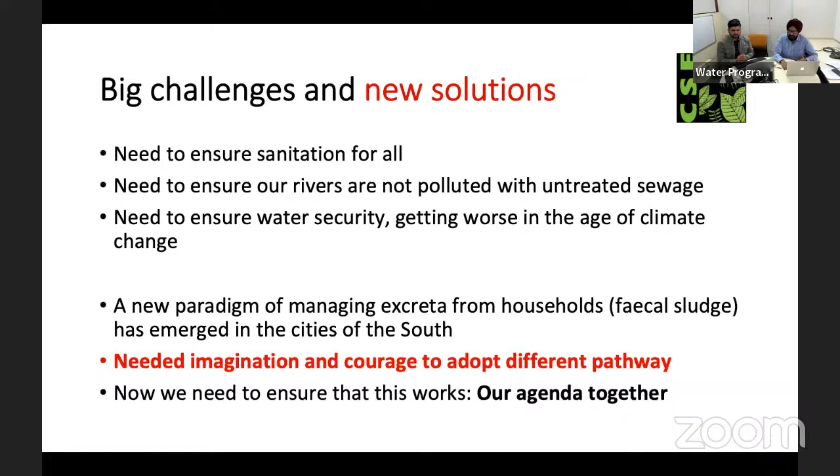A new paradigm for managing excreta from households emerged in the cities of the Global South, the FSM intervention, and we need to look at it as a nascent, growing initiative which may need several corrections, mistakes may have been committed. But what is most important is that FSM provided a much needed imagination and courage to adopt a different pathway, which was not done so far. And now we need to ensure that what we started works, and our agenda together is to make it work. These are just a few slides on one state, because Mr...

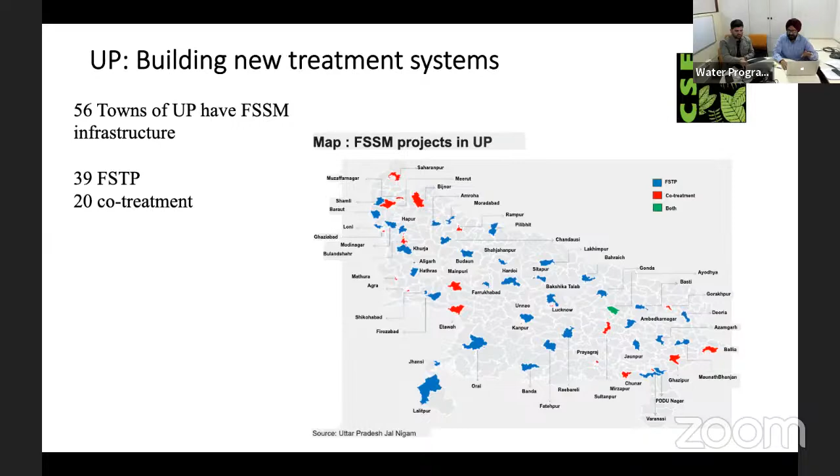I am only sharing the kind of scale where CSE is working in one state. In a province like UP itself, we have 59 treatment systems which were implemented. We had different technology systems, and this is also a contribution of Dhaval when we tried to map out the kind of treatment systems we have in India. We realized that it is nature-based systems and hybrid systems predominantly—I'm not saying this is the case everywhere, but this is how we look at the technology systems emerging on the ground.

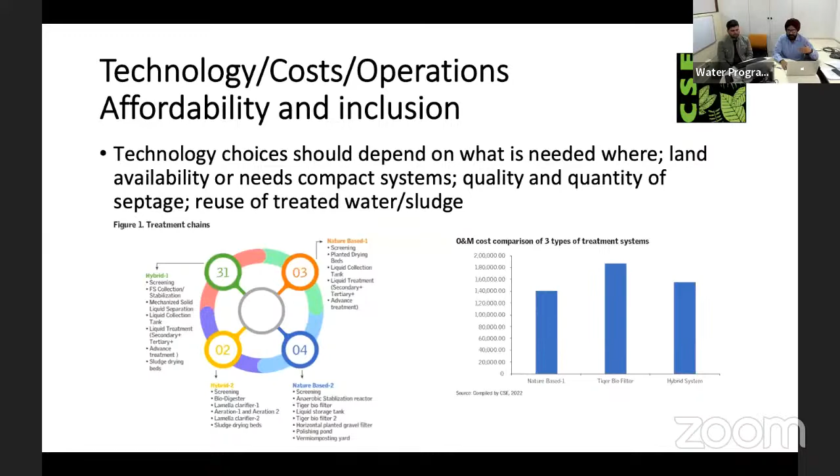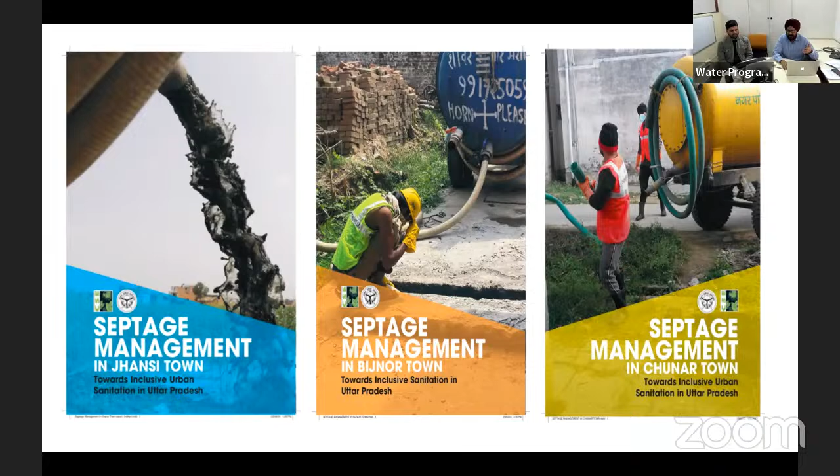We try to do an analysis of what is there. In CSE, we looked at the experience in different towns, documented it, and tried to address the gaps emerging from there. This is what we feel represents a challenge for an agenda for a new generation reform, which CSE is pursuing in our work. And with Mr. Mahapatra in Odisha and several other states, we are also partnering.

So FS treatment systems are there, but the hard work begins in ensuring the plants work at capacity. We need to ensure that the technology in FSM is robust in terms of standardization and provides guidance. We need to focus on the reuse aspects of both water and sludge, and we need methodologies to track the outcomes for both.

We see there is a little fatigue in India and elsewhere. When we talk of FSM, everybody wants to jump towards citywide inclusive sanitation. We are not saying we don't want to, but we need to ensure that what has happened is robust and sustainable. Then we hope we'll be able to make a better jump towards CWIS.

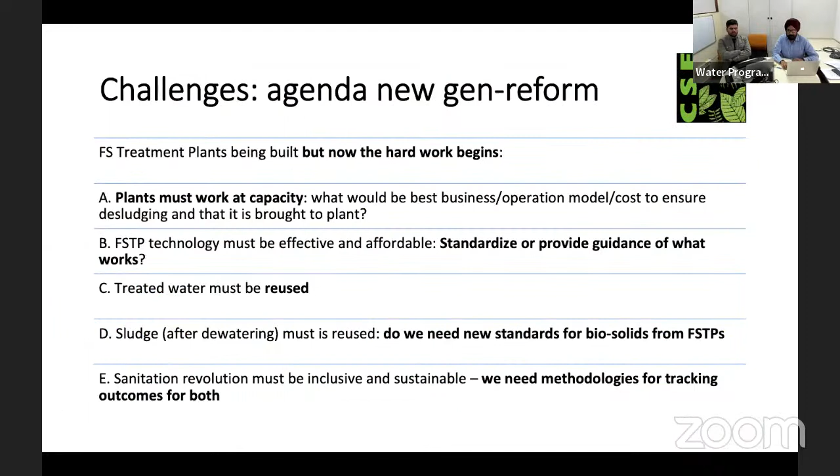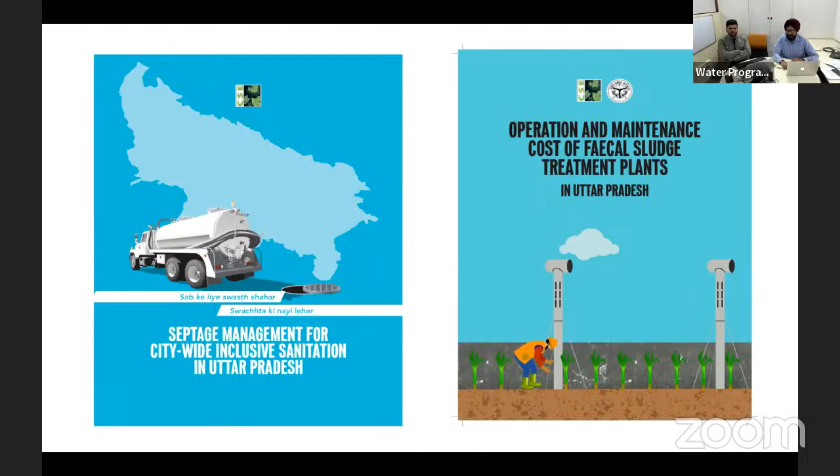So this is what CSE has been doing. We have looked at all the works done in our state—what is the status of septage management, say in UP, and what are the operations and maintenance aspects. We have tried to document and analyze that.

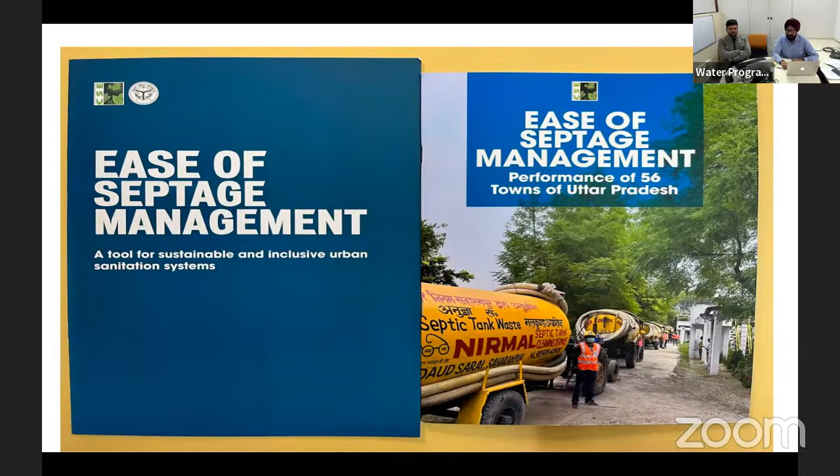We have also assessed the performance after a year, through a tool which looked at a 3-star rating of towns at different levels of septage management performance. We worked on operations and maintenance, state model bylaws—these are all enabling guidelines to ensure the work is sustained. We don't just give up once the construction has happened; we ensure the plants become operational.

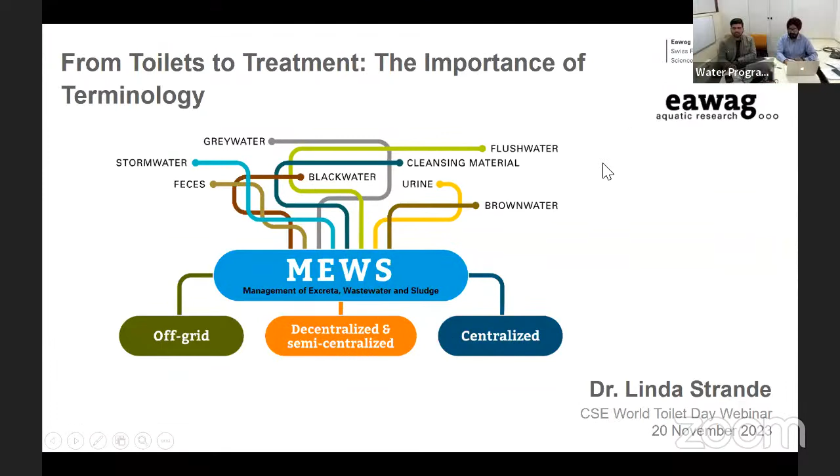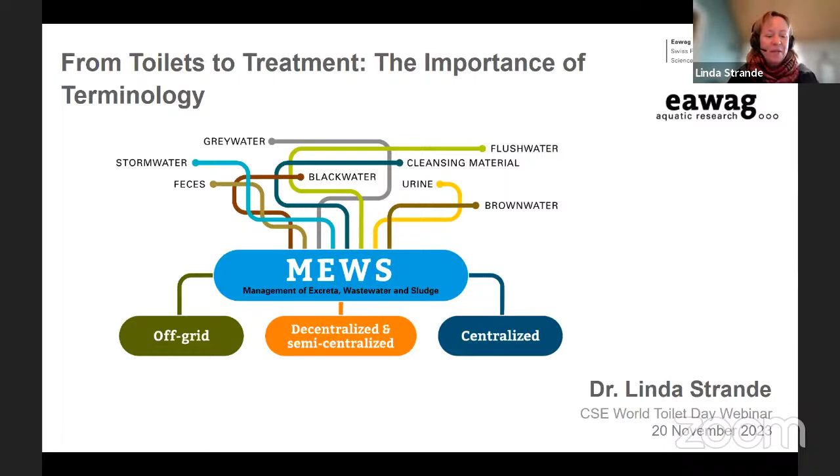As you said in the introduction, I lead a research group called MEWS, which stands for Management of Excreta, Wastewater, and Sludge. Today I'd like to talk specifically about terminology, starting with three examples of where terminology has brought us. The first is sanitation: it was only in 2002 that sanitation was incorporated into the Millennium Development Goals, which had a huge impact because prior to this time, development projects were mainly focused on drinking water provision.

The second is sustainable. In 2003, the United States EPA, Environmental Protection Agency, officially put in their guidelines that non-sewerage sanitation could provide sustainable long-term solutions, which also brought a lot of credibility to our work. And the third is treatment.

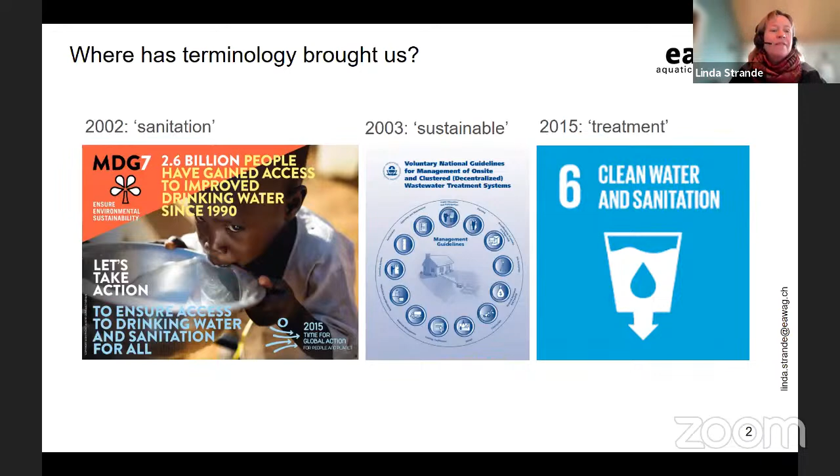In 2015, this was incorporated into the Sustainable Development Goals, and it's really helped us increase awareness of the importance of transport of wastewater to treatment, be it via roads or pipes. This has brought us a long way, and this recognition has helped us galvanize our field. We have increased public awareness, which can lead to change through political pressure, increased commitment, uptake, and incorporation in national regulations and implementations.

We're looking at citywide scales and employing a service delivery approach instead of just infrastructure provision. There's an increase in evidence-based research, and knowledge sharing, education, and mentoring has helped build a critical mass of engineers, practitioners, and scientists working on sanitation. But we know we still have a long way to go.

This figure is from a recent publication I co-authored together with authors from the UK, Brazil, Uganda, Vietnam, and Japan. What you see here are the three basic existing modes of sanitation service provision. On the left, we have sewer to treatment. This was originally planned for urban areas where there's a high enough population density to support it. It relies on a flush toilet where water then conveys waste to treatment, so it has fairly liquid wastewater, and the level of technical development is established.

On the right, we have at-source land-based treatment. This was originally planned for rural areas up to the urban periphery where there is enough land available for adequate treatment. This can be dry toilets or flush toilets, so the wastewater generated is liquid to semi-solid, and the level of technical development is also established. What we have in the middle is transport to treatment, and this relies on at-source containment and storage.

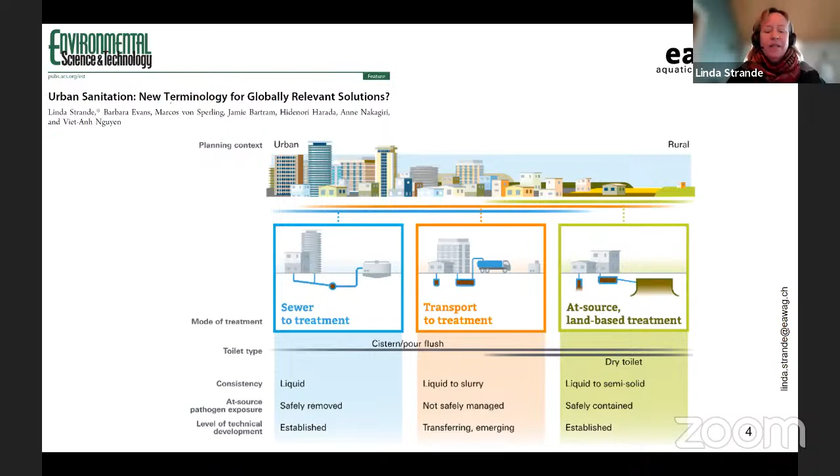We don't talk about fecal sludge in Europe. Another misconception is that it provides equivalent levels of treatment to those associated with land-based treatment in rural areas, which is often not the case based on incomplete containment and service chains. So we know that in reality the management is much more complex and often does not result in the delivery of safely managed sanitation.

So again, why does terminology matter? I think we all agree that in urban areas, excreta must be transported away from the point of production for treatment, or safely managed and recycled at the point of production. The misuse of fecal sludge and on-site sanitation have been confusing or ambiguous, which hampers planning of improvements. So some people now have switched to using non-sewered sanitation instead of fecal sludge management, but that's also ambiguous. What you see here are the good friends Pee and Poo having a moment of existential angst, where Pooh says, 'What does it mean that we're non-sewered?' And P replies, 'Yeah, what we are not says nothing about the complexity of how or if we are even safely transported to our final fate.'

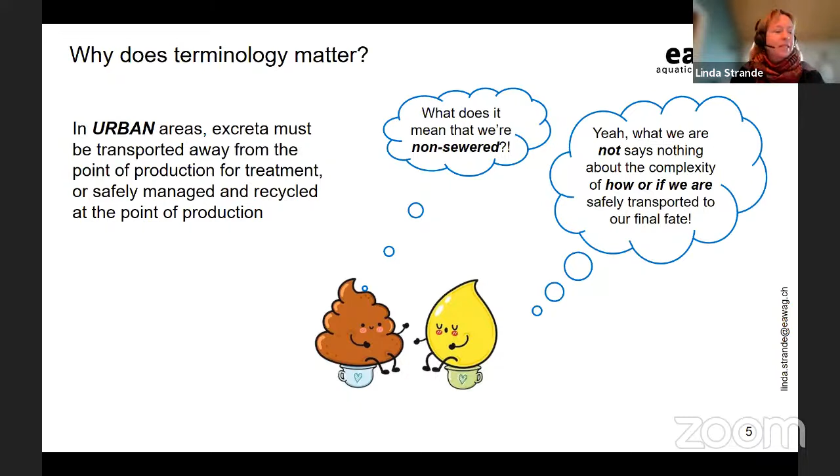To illustrate, I'll provide some more examples of how our increase in scientific knowledge is chipping away at these misconceptions. The first is that 'fecal sludge' is not a useful descriptor. Fecal sludge conjures up images of dry, thick, sludge-like feces, when in reality, what is referred to as fecal sludge is typically less than 5% total solids. It includes water from pour or cistern flush toilets, cleansing, bathing, and cooking.

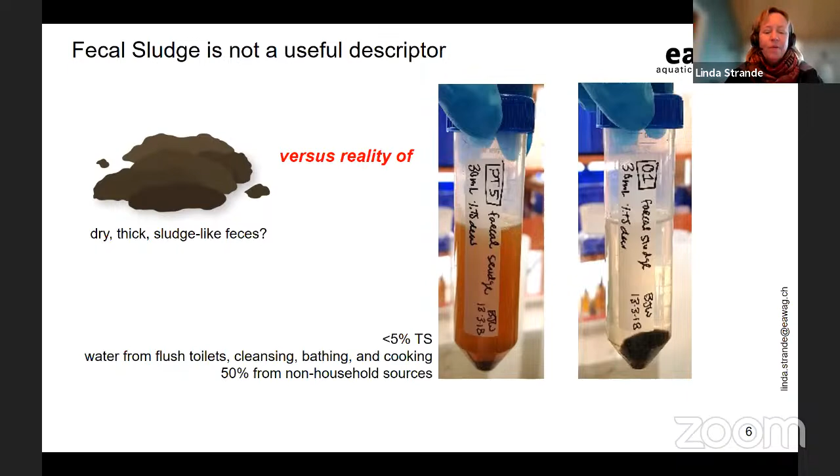Although global statistics on sanitation coverage are limited to household care facilities, the majority of people spend most of their waking time outside the household where they sleep at night, and non-household sources could be 50% of total wastewater production. It's coming from offices, restaurants, markets, malls, small-scale manufacturing, hotels. And when planning for fecal sludge management, these streams are rarely accounted for, resulting in inadequate management capacity.

The next point is that septic tanks and pit latrines in urban areas are in fact not septic tanks and pit latrines, which also calls into question what is sometimes meant by septage. The reality is often a chaotic mixture of inappropriately constructed solutions that attempt to contain and store wastewater on site. As we saw in the last slide, huge volumes of liquids are flowing into containments, which can be as high as total water consumption also from industry.

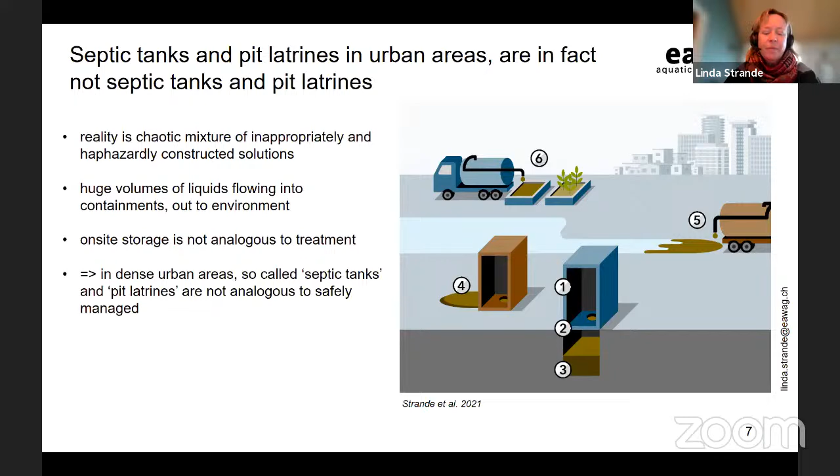I just want to emphasize that on-site storage is not analogous to some form of treatment, and simple leach pits do not replace the pathogen removal that occurs in engineered drain fields in land-based systems. The liquid coming out of these so-called septic tanks is not safe for transport in open drains or sewers. So in dense urban areas, so-called septic tanks and pit latrines are not analogous to safely managed systems.

The next point is that wastewater streams from human feces are not all the same, and this has significant impacts on treatment. If we think about sewer-based wastewater, wastewater is only referred to as sludge after it's undergone some type of treatment process. It can consist of settled solids from primary treatment, microorganisms or biomass from biological treatment, and digested biomass. Fecal sludge, on the other hand, is stored at the source from zero to many, many years prior to batch-wise collection for delivery to treatment.

Importantly, at-source storage is not analogous to the anaerobic digestion that's highly process controlled at treatment facilities, and storage is not treatment. This has led to the misconception that time since last emptied predicts stabilization, which is not correct and does not hold up to scientific investigation, and also leads to misconceptions about appropriate co-treatment.

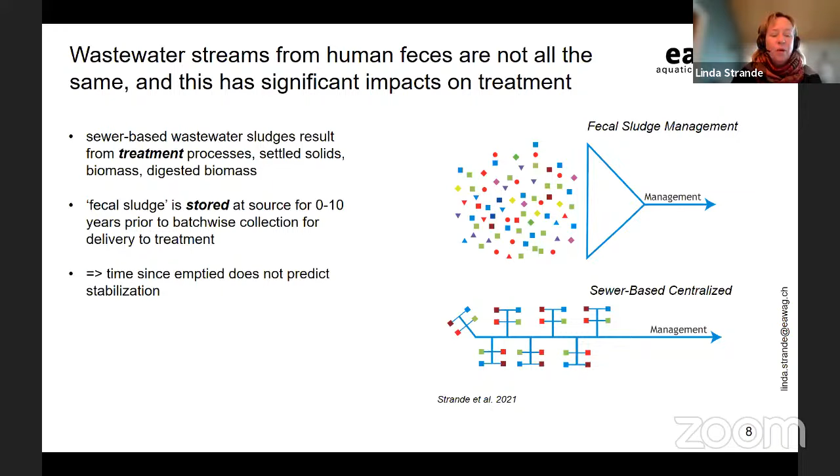I submit that the use of accurate and technically robust terminology will improve management decisions and the design of appropriate treatment facilities for the actual flows they are receiving, and increase opportunities for resource recovery.

As is the name of this webinar, in our paper we propose a new vocabulary for how wastewater is transported to treatment. This is important because otherwise, as we know, wastewater or fecal sludge often does not make it to treatment. What you see in the bottom left-hand corner, category 1, is fully road transported. This is what we would call fecal sludge management, and in this case tanks should be fully sealed to prevent leaching into the environment.

In the paper, we give cases and examples from around the world. In this case, we give the example of Egypt and Dubai. The next one, category 2, is separate collection of gray water. Gray water could be piped away to treatment or safely managed and recycled at the point of production. Here I would just like to refer to the case of Odisha, which is being presented in this webinar by my colleague, the engineer-in-chief.

The next one is category 3, mixed transport. This could be settled sewerage, where we have interceptor tanks that collect some settled solids with the liquid being piped to treatment, or also the example of Johkasou treatment in Japan, in Tokyo and Osaka. Category 4 is fully pipe transported, which may be conventional or simplified sewerage.

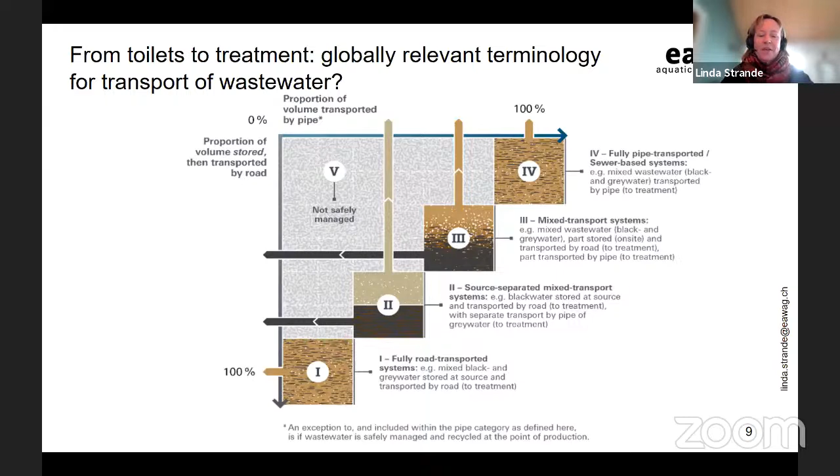So again, I just want to emphasize, I feel we need improved communication and understanding to inform design, decision-making, planning, monitoring, policy, and science, and that we need a globally relevant vocabulary. I'd like to leave you with that brief introduction as food for thought, and I'm looking forward to hearing your opinions on the topic. Thank you.

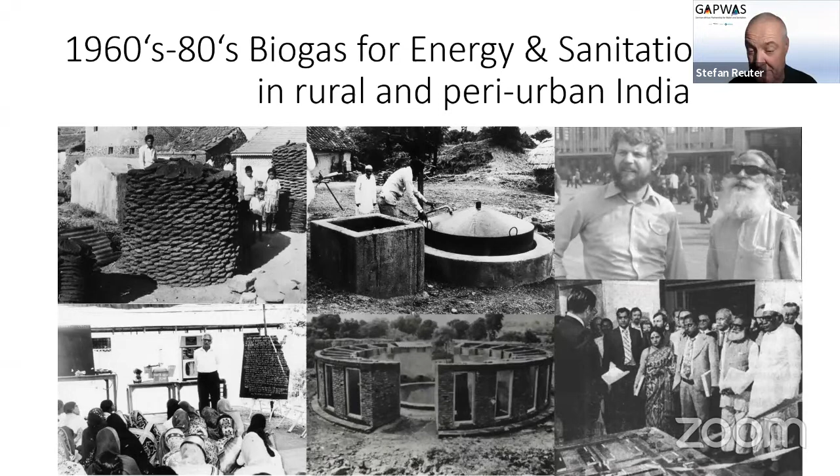Jashbhai Patel and his Gobar gas plants were in ignition there, and that was boosted after the oil crisis in the 70s. What you can see down in the middle is a community toilet connected to a biogas plant, a fixed dome biogas plant. So I think the journey of using anaerobic technology, taking out the energy for also treating wastewater from toilets has started quite early on.

In the 90s, despite all the nice biogas technology, people continued moving in big numbers into cities and ended up in deep shit. That's why a number of people, the German NGO BORDA, French, GERES, 2 Chinese and 3 Indian NGOs between 94 and 96, were putting their heads together and saying, okay, how can we expand and build on what we have been developing in order to do some kind of wastewater treatment, because something is better than nothing. So 100 plants with 30% efficiency are more effective than 10 plants with 90% efficiency.

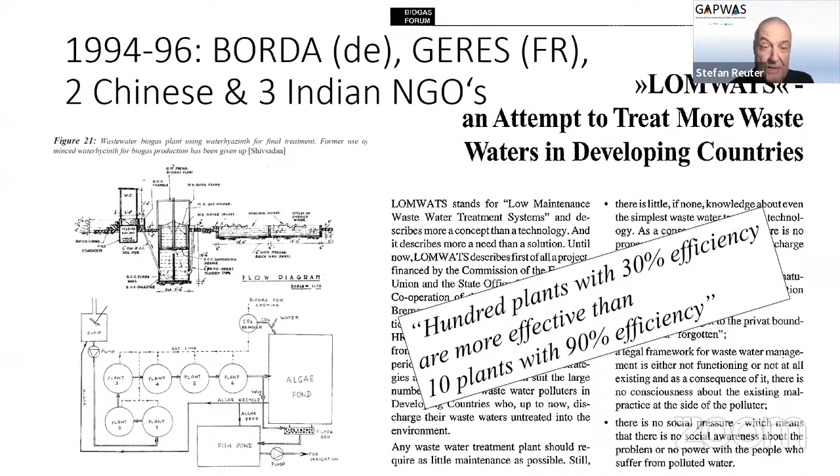And this is not only an issue for the South, but also in Europe. When new member states of the European Union joined, we traditionally in Europe have been going for the highest treatment efficiency, but meanwhile a number of wastewater treatment discharges, also agricultural discharge, is going into the Baltic Sea, and we have a lot of anoxic zones there.

But the output of that joint effort between China, India, France and Germany was to come up with a handbook with Excel spreadsheets. Actually, the initial title of 'low maintenance wastewater treatment system' was then changed into 'decentralized wastewater treatment systems,' because LOMWATS carries unjustly an image of low standards, and nobody wants that.

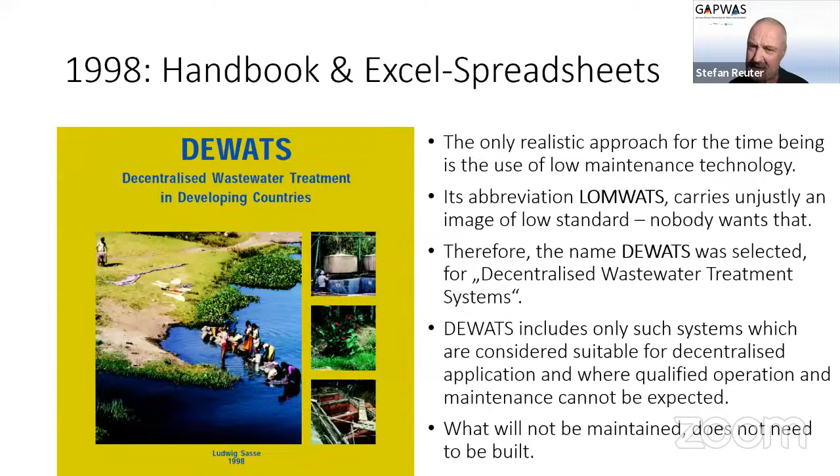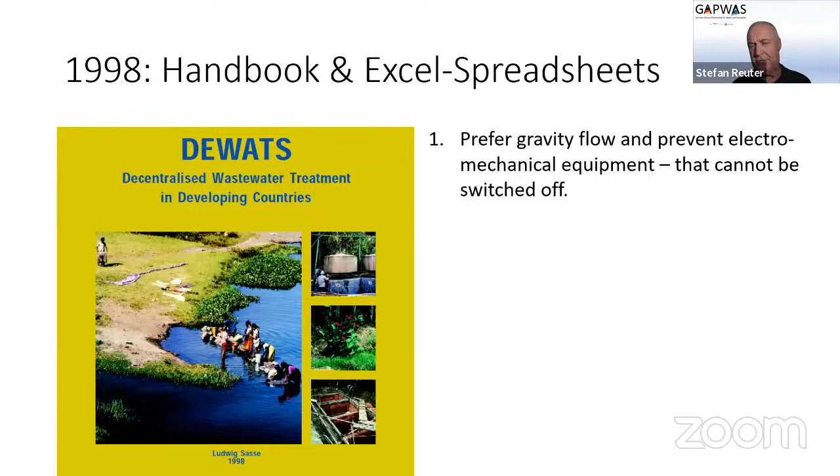But what was it about? It was actually just 5 points. Prefer gravity flow and prevent electromechanical equipment so that nothing can be switched off, even in power shedding and other difficulties. Go for anaerobic digestion under tropical conditions. Up to 90% of the organic load can be removed.

Underground tanks of that anaerobic treatment allow for dual use. You can put them into public roads or into parking lots for cars, so you don't need that much space. Add nature-based systems for further polishing, like planted gravel filters, polishing ponds where appropriate, and also maybe at a distance where you pool a number of pre-treated wastewater from anaerobic treatment. Reuse water, energy, and nutrients wherever you can, and select and combine treatment modules according to that end use. Think at the end from the beginning.

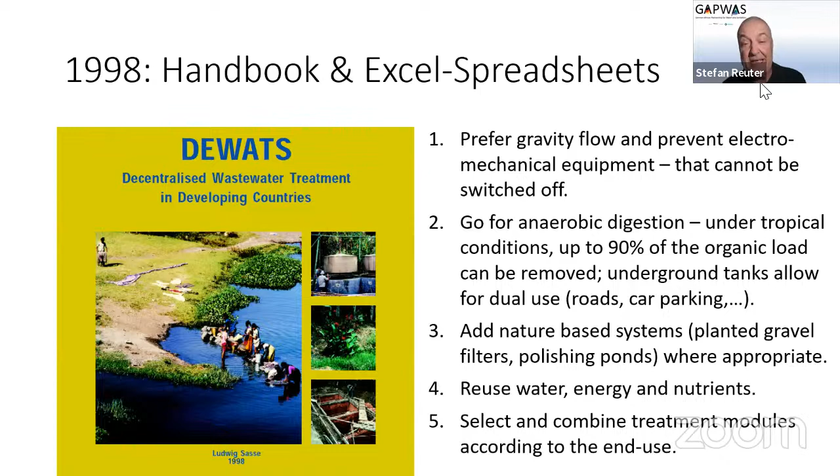So these are some of the thoughts, and a number of systems were presented, modular modules as and where required. It's not a must that you first start with an anaerobic treatment and then go for the next one. It's just a logical way, but each engineer should assess according to the local condition.

CSE has been doing a wonderful webinar 3 years back. A partner organization in India, CDD Society, has very nicely explained how these systems work. That was a webinar in 2020, and in the minutes from about 1 hour 10 minutes to 1 hour 20 minutes, PG Ganapathy was explaining all the details about decentralized wastewater treatment systems.

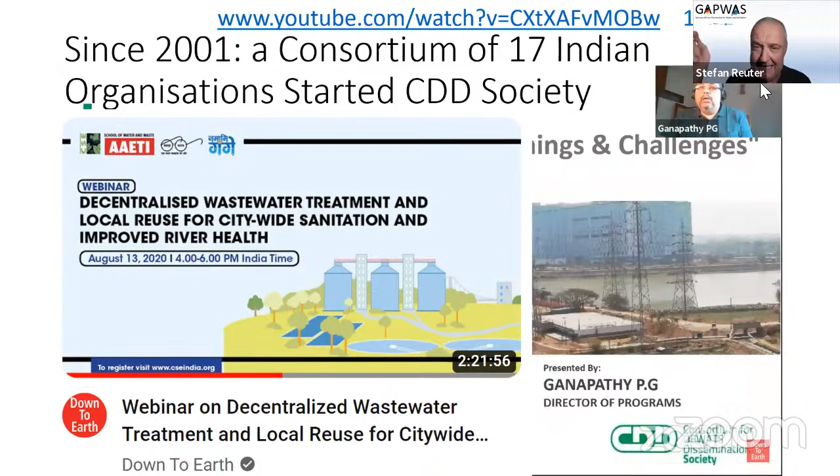Actually, it's an organization which brought together more than 17 individual organizations who came together and said, okay, let's build a consortium, let's build a movement. Very early on, CSE India has been part of and adopting and promoting that. In Delhi, this organization, the consortium, happened to stay in Bangalore.

So then the next important step was in 2012, when the Central Public Health and Environmental Engineering Organization, CPHEEO, integrated both from the engineering part and also from the operation and maintenance side, these kind of decentralized modules, which is essential for doing DPRs, detailed project reports, public tendering, and then going for procurement. If this is not included in the CPHEEO manual, public authorities will have a hard time to procure those elements which are needed.

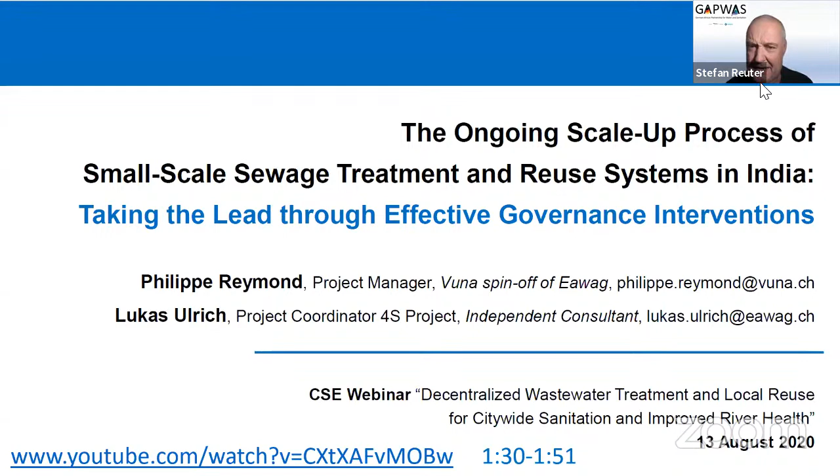So in that very webinar I'm referring to, which was happening 3 years back, there was another presentation from our colleagues from Eawag, a neighboring department from Linda. It was looking at the learnings from revisiting more than 300 of these decentralized systems, and a number of them really drilling holes into them. So what we're looking at here, and let me come back maybe to Linda's category suggestions.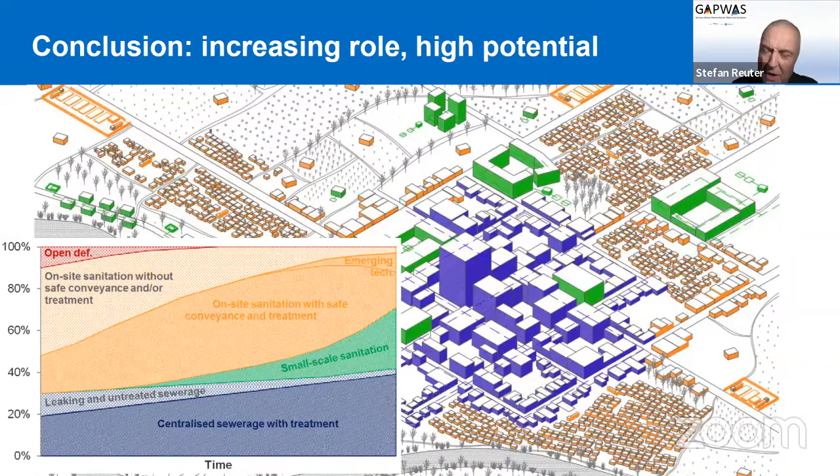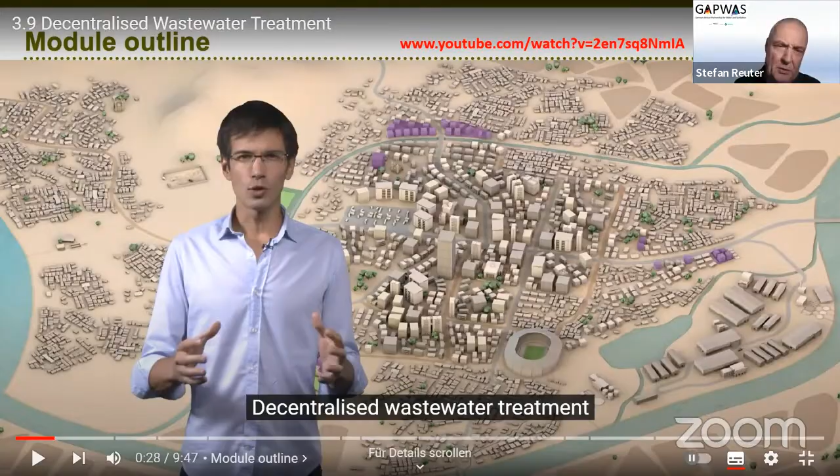So what does it take? They have been even building a wonderful MOOC, an online module over 10 minutes, where everything and the approach was explained, and also the findings and key takeaways. And I will a little bit delve into that exercise, because I think this is a number of elements have been developed and shown there, and I'm really keen for the case of Africa.

What can we learn? Where's India right now? So a number of organizations, the Indian Institute of Technology Madras, BORDA, CDD India, and also ENPHO have been working on that one. And a number of publications have been developed in order to come up with evidence-based recommendations for small-scale sewage treatment plants.

And these would be the category 2 and 3 in my understanding of the new categories. So both source separated, maybe gray water treatment apart, or it is mixed source, but then an overflow from our decentralized treatment plant will go somewhere, and still they will have sludge accumulation every 2 to 3 years. Something needs to be emptied and be treated off-site.

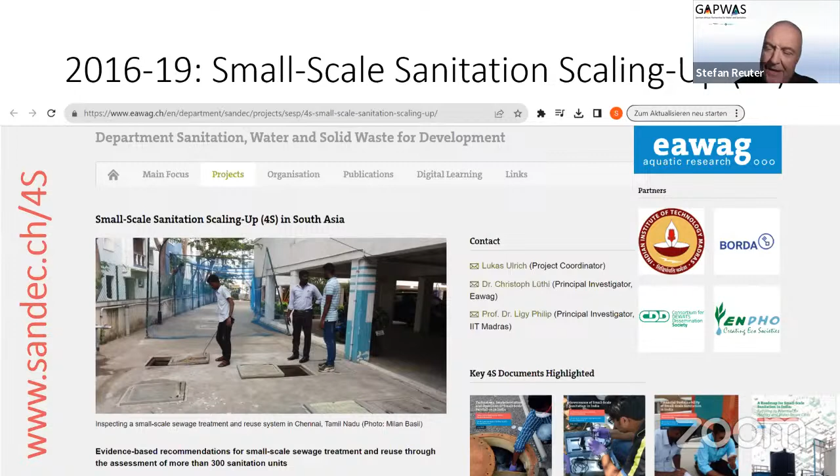So what are the recommendations from assessing more than 300 systems? Governance aspects are very important, have been published in this document and with this access key. And what you can see on the left side here is the recommendation not only to look at the CapEx, but at the operational expenditure, OpEx, over a 20-year life cycle cost.

And although you can't really see in detail what is happening here, down in that scale, you have the technology, different technologies enumerated with a different capacity in kiloliters per day. So we start with 40 kiloliters per day and end up with systems of 700 kiloliters per day, and different technologies are compared. So now over the 20-year life cycle, you see that some technologies will consume up to 12 or 17 times the initial CapEx in operational expenditure.

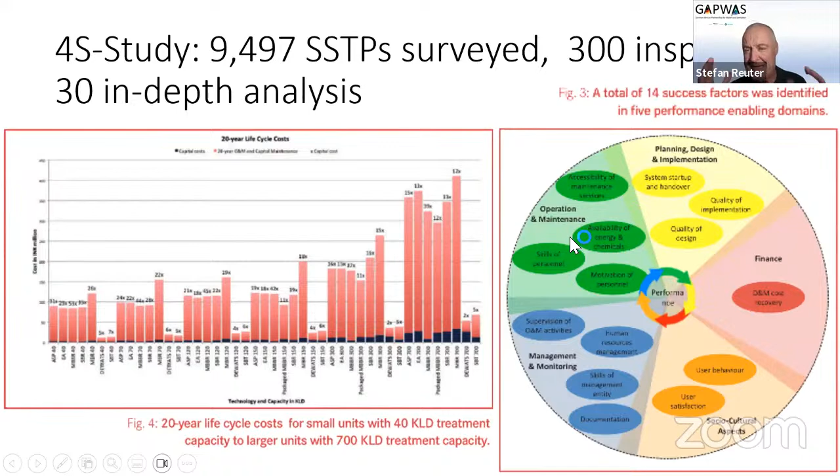And because that's a high expenditure, often underestimated, it's important to look at that from the beginning. So there are a number of technologies which only add up to 2 times the initial capital expenditure. The higher you are here, 2 times, 5 times, or maybe 7 times. So this is important to look at, as well as a number of findings when it comes to the overall implementation cycle. What makes sense to implement?

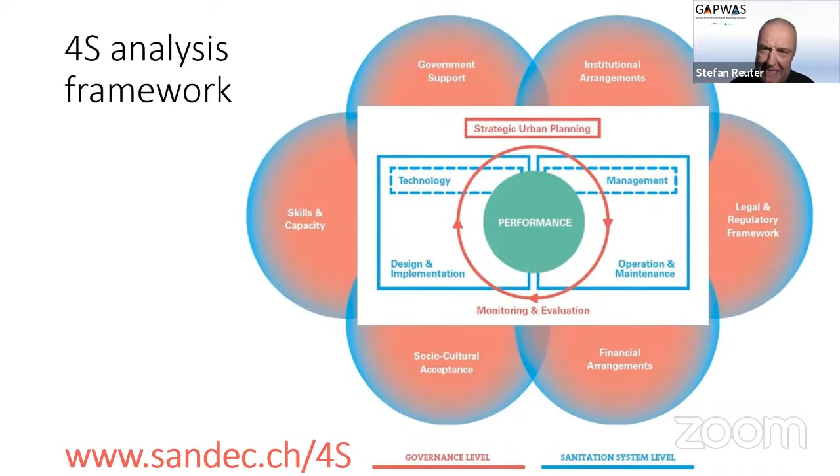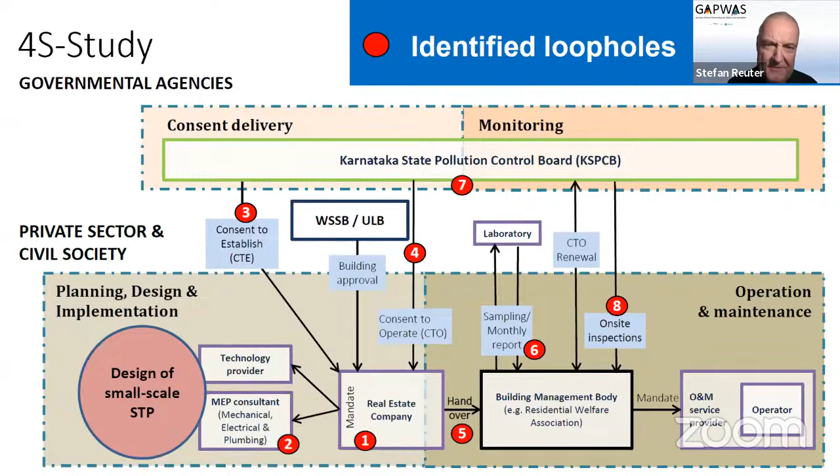I recommend very strongly you revisit the link that I have been sharing and look at these, looking at strategic urban planning, the management part, the technologies. A number of loopholes, as they have been presenting there, may arrive despite the beautiful design of a treatment system. And these elements, I think we want to revisit, and this is where Africa wants to learn from India, where you are right now.

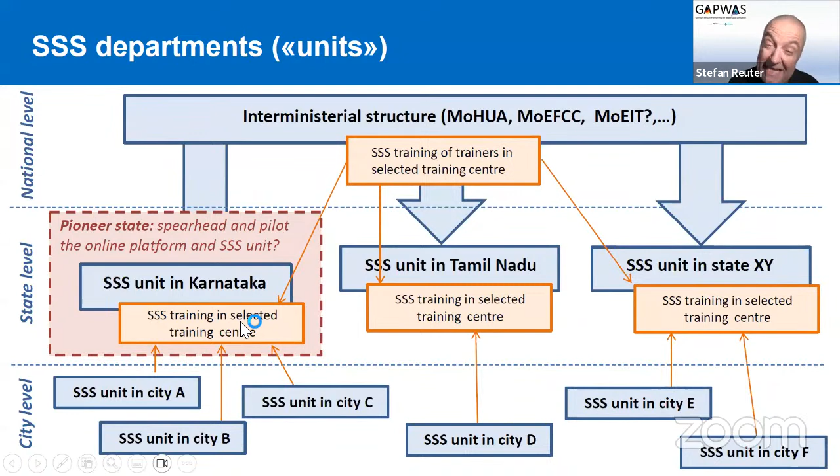So at that time, the experts were recommending an online platform for collating databases, streamlining, supporting processes, and also establishing dedicated small-scale sanitation system departments at the relevant state and city level government. So we have a national level government, the ministry level, the state level, and the city level, and all our decentralized systems need to be taken care of, and it needs special care from specialists.

The creation of a centralized online data platform is essential. Urban local bodies and also water and sanitation boards in the municipalities should be able to access and update these databases for small-scale treatment plants to be involved in their planning, better enforcement, a clear standardized procedure for handover, systematic training and licensing of operating personnel on the different systems and tools we have been planning and implementing, and also the life cycle costs. Right now, the CPHEO manual, to my memory from 2013, is saying that a cost analysis needs to be done, but it doesn't mention life cycle costs.

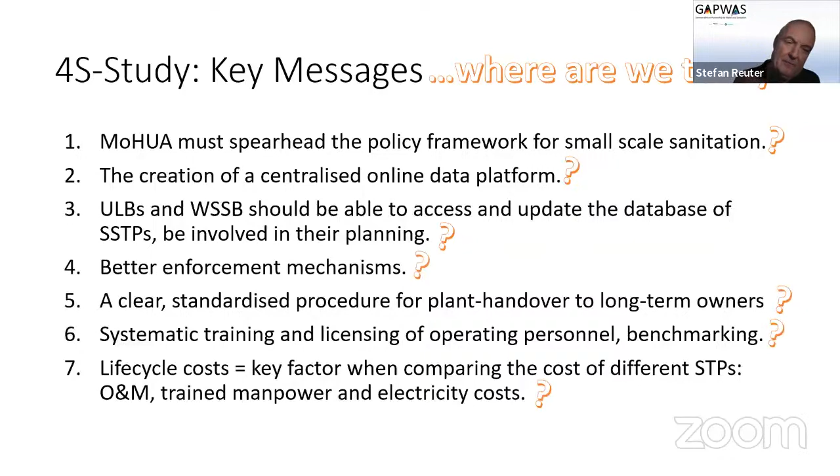So these are questions where I think there's room for African colleagues to learn from the Indian journey. We would like to foster South-South learning and invite Indian actors to join African colleagues at the African Water and Sanitation Association and other international partners in fast-tracking the adoption of appropriate procedures for safely managed services along the sanitation value chain.

A first exchange in that direction already happened with colleagues from CSE and CDD India at the first National Non-Sewered Sanitation Conference in Joburg in October this year. So there's an invitation to join the African community during the AFWASA International Congress and Exhibition from February 18th to 22nd, 2024 in Abidjan, Côte d'Ivoire. Thank you very much, looking forward to more exchange on the topic.

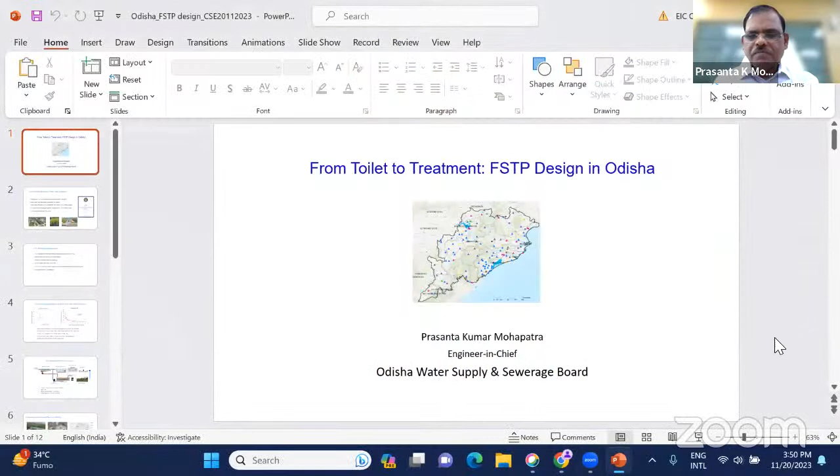I welcome you to this presentation. I will be speaking mostly on the FSTP designs in Odisha and also take you through what has been done in Odisha so far.

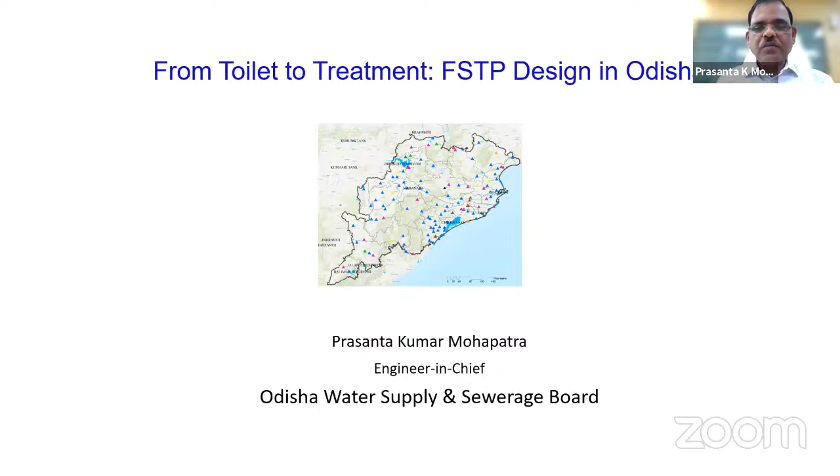In 2017, we had a new sanitation policy to manage sanitation in Odisha in a better way. Odisha has 115 cities, and the urban population in these cities is 7.74 million. By virtue of the town planning, or where the cities are,

black water and grey water are separated at source. We have a lot of on-site sanitation systems, so black water flows to septic tanks and soak pits, and grey water flows in the drains, in the drainage systems. In fact, 5 of our cities have established sewer networks with STPs.

So we would have continued with those sewer networks and STPs, but we learned that this sewerage system is not the ultimate answer for the cities of Odisha. First, it is taking a lot of time to build network and STPs in our cities. The per capita cost is also very high. And then the National Green Tribunal was coming very heavy on us to manage sanitation so that we don't pollute our rivers.

So then there was a paradigm shift. The state decided in 2015 to move to on-site sanitation systems, the fecal sludge management systems. Since 2016, we started implementing FSM in all our cities and established the infrastructure necessary for that - the desludging arrangements, the FSTPs we constructed. But simply FSM is not the solution. FSM will not solve the sanitation problem.

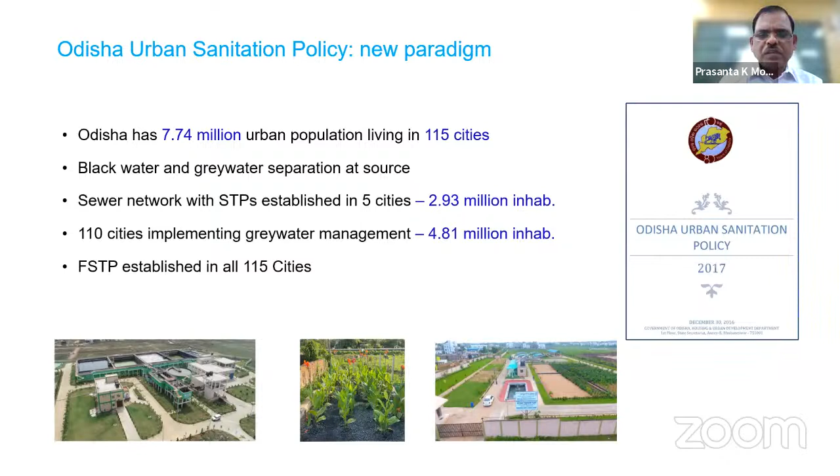For managing grey water that flows in our drains, the approach is very decentralized because it flows in the drains. Our approach is to have soil absorption systems for containment at the household level for grey water, and also treatment systems, for instance wetland systems. We are adopting wetland systems for treatment of grey water. And at the outflow level, we are considering low-cost systems like waste stabilization ponds and maturation ponds for grey water systems. Now, my focus on this presentation is on fecal sludge management.

When we started in 2015, we didn't have much example in the country. The only available literature was the famous FSM book published by IWA in 2014, and then the DEWATS book, which Mr. Stefan was referring to. Those were the handy books for us to look at FSTP designs.

So we designed the FSTPs to remove BOD, COD, and TSS, and in the effluent, whatever nutrients were available, nitrogen and phosphorus. We considered reusing that effluent in the landscaping within the FSTP premises. We adopted nature-based technology, and the land we selected was not very far from the city, always within 2 to 5 kilometers.

By design, we acquired 1 hectare of government land, and most of that land for FSTPs was co-located with solid waste processing sites. We ensured that the design we prepared - the process design, the layout, and all - was vetted by IIT Kharagpur. That gave us the stamp of authority to go ahead with construction.

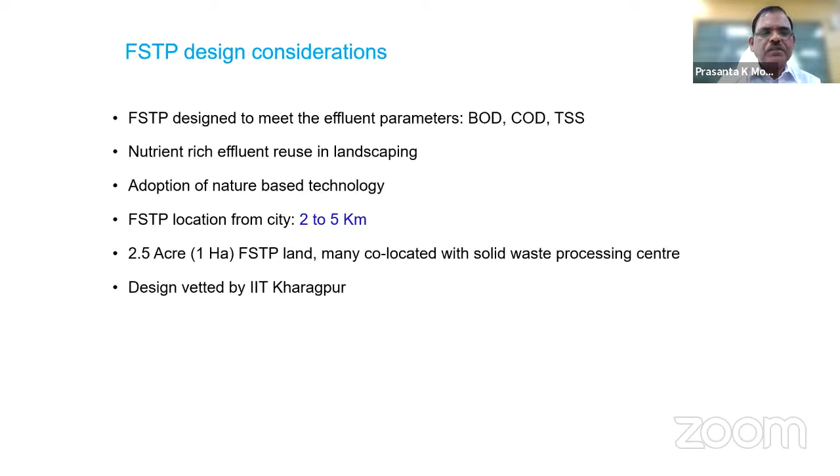To start with, the quantity of FS generated in any city in Odisha - we looked at a small city near Bhubaneswar, the capital city of Odisha. The population there is 50,000 to 100,000. We went to all the septic tanks, took the dimensions, and noted down the sludge depth.

What we realized is that none of the septic tanks are designed as per the standard - there are various sizes, various dimensions. Then we looked at the sludge depth to try to find out what could be the per capita sludge that is getting generated. We had adopted the value of 150 liters per capita per annum.

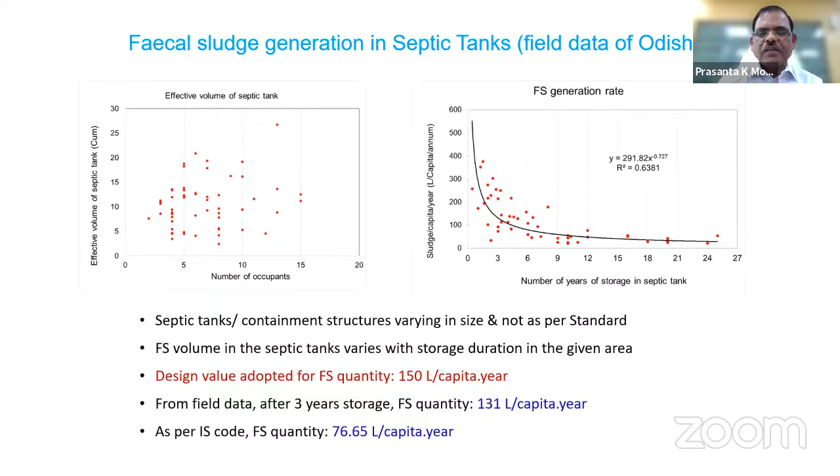From this data, from the field observation, we found 131 liters per capita per year if we go for a 3-year desludging period. And when we looked at the IS code, it talks about 76.65 liters per capita per year. So we are comfortable that whatever design we have adopted is well within the quantity we assumed - it is neither under-designed nor over-designed.

We have adopted sludge drying bed technology along with a DEWATS system. We have ABR integrated with anaerobic filter. We have the wetland, or we call it planted gravity filter, integrated with a sand filter. We have a polishing pond integrated with a cascade aeration.

As I mentioned, the effluent is reused in the plant premises itself, and the sludge is dried for a 2 weeks period. We have a good climate here in Odisha, sunny and dry. This sludge, we have also started co-composting to further stabilize and make it suitable for reuse. Currently they are used for soil conditioner and land filling in our low-lying areas.

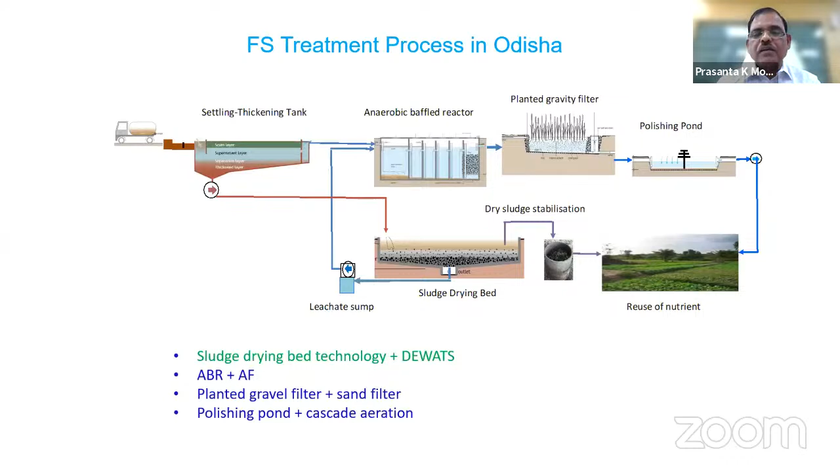In fact, when we planned for 120 numbers of FSTPs in 115 cities, we have already operationalized 113 plants in all in the 111 cities. So the remaining will be completed in a month or so.

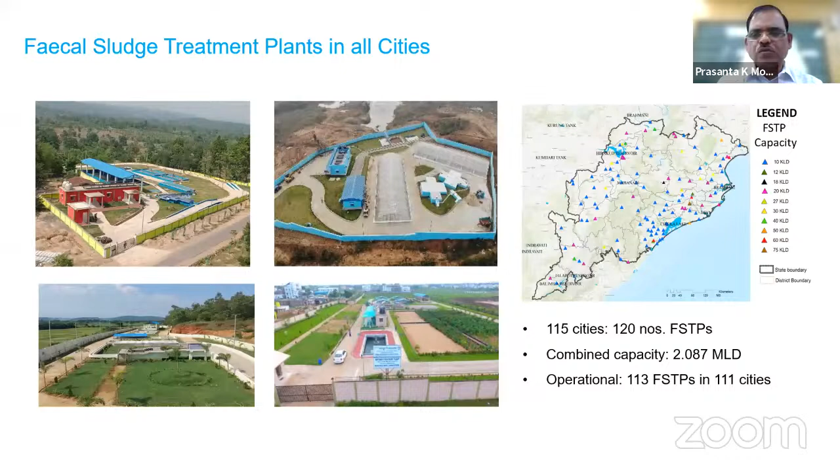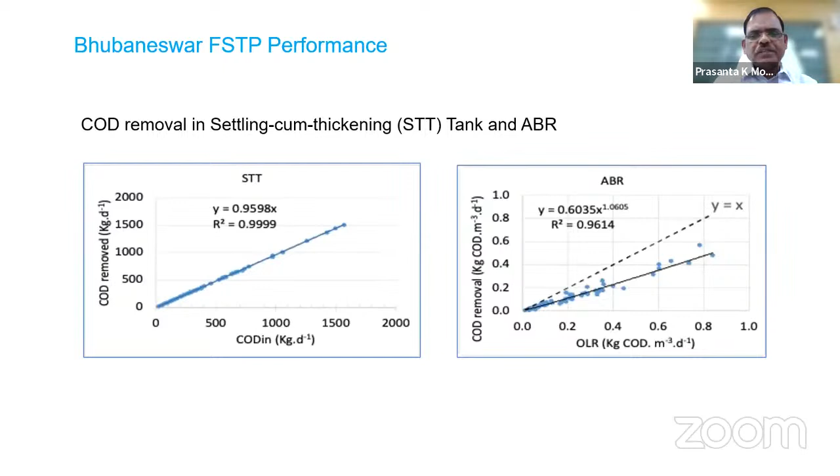The plant at Bhubaneswar is visited by many people, and so also we monitor it very vigorously. So what we observed is that when we have adopted a settling cum thickening tank in the beginning of the process, it removes most of the COD. We expected that the ABR will be heavily loaded, the organic load will be high, but then we find that the organic load is very low, and with that we are able to achieve BOD, COD, TSS removal in a very perfect way.

As you have already marked, our standards are evolving. The latest one is the NGT order of 2019. That is a very stringent one, where it talks about removal of nitrogen and phosphorus, and also very stringent on the fecal coliform.

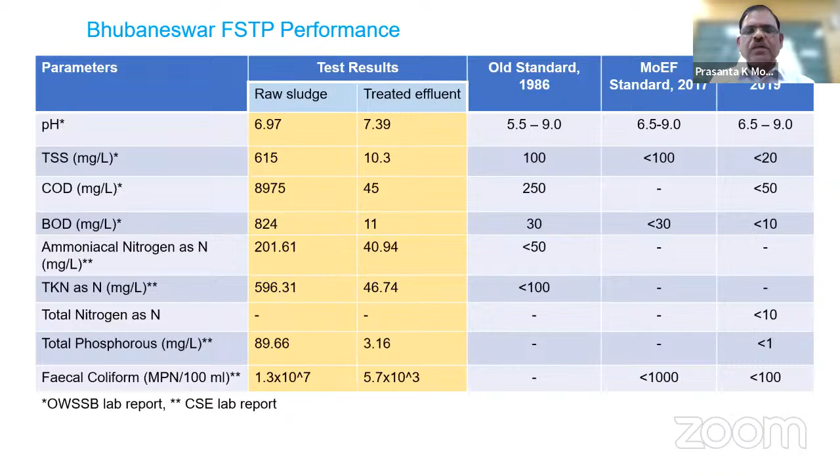And the one that I have presented here, we have a lab in our FSTP, so it shows that we are able to remove in most of our FSTPs. It's possible to remove BOD, COD, and TSS. It is also possible to remove part of the nitrogen and phosphorus, and whatever remains in the effluent is used in the landscape irrigation.

In our co-treatment facilities, we only establish a settling cum thickening tank, and flow is by gravity. So this is the co-treatment plant in one of the cities. It's Puri, an aerated lagoon STP, and FSTP is integrated. The result that we get is also meeting the norms, and the discharge happens after chlorination.

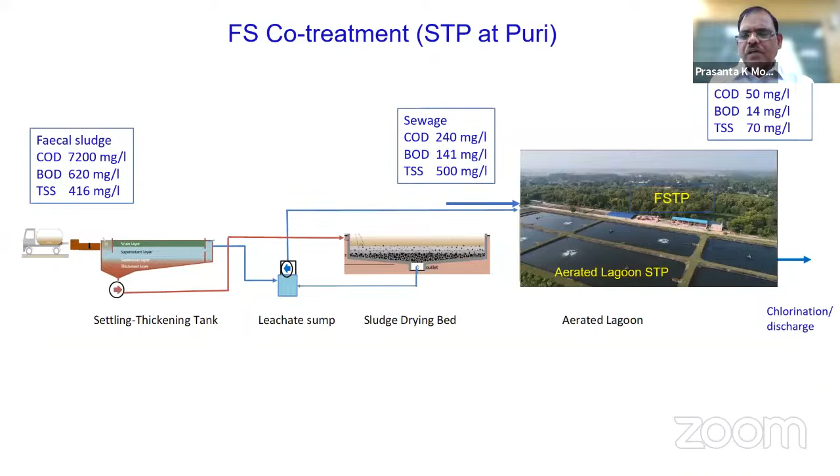The cost of the FSTPs in Odisha is also not very high. It's around 3 crores or 30 million Indian rupees on an average. So we have already spent some 300 crores for building all the 120 FSTPs in Odisha. In terms of operation and maintenance, the cost is not very high. In terms of Indian rupees per month, it is always less than 100,000. So for a ULB, the cost is not much.

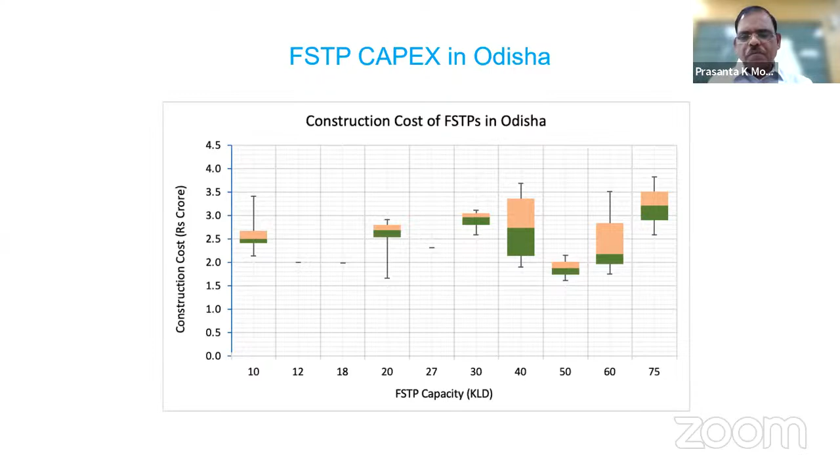Because it is a nature-based system, most of the cost goes toward the wages of the people who are employed there. In fact, in Odisha, we have employed the Mission Shakti group. Basically, they are the women and the transgender group in the operation and maintenance of the fecal sludge plant. Because there is not much technology or mechanical system involved, we are training the community partners in the operation of these plants, and they have been able to successfully maintain the plants. That is the USP of this program.

And these Mission Shakti groups are also able to create awareness in the towns and the cities. So they are our messengers, the town's messengers. They go to each household, spread the awareness of desludging requirements, and also they are very successful in creating generation of awareness and also generation of demand for desludging, and they have been able to successfully operate the plants.

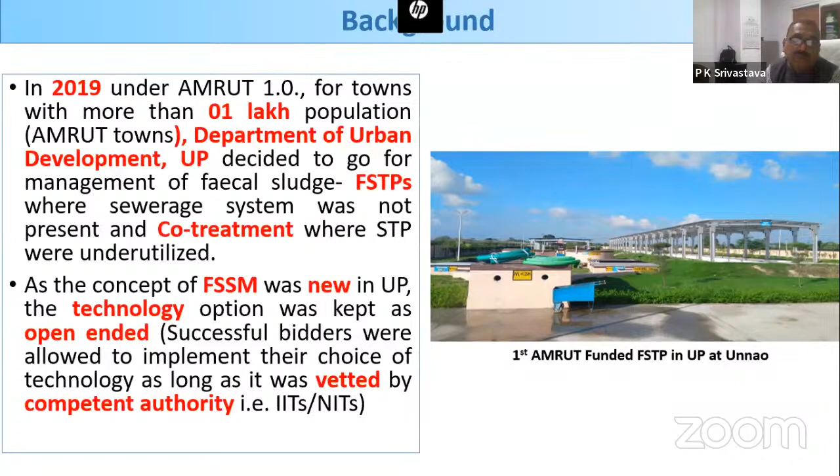To start with this presentation, I would like to tell that the first FSTP came in Jhansi city, Jhansi town, with the capacity of 6 KLD. In the Bundelkhand region, the entire strata is rocky - there is a hard rock beneath earth. So the sewerage network could not be laid in the Bundelkhand region, including Jhansi, Lalitpur and Orai.

So the FSTP and FSSM is the best option in the Bundelkhand region. Similarly, in the Mirzapur, Chunar region, there is some rocky belt, so FSSM is the best option there as well.

As we know, the land issue is very problematic in big cities. For the STP, we need a big land, a very large capital investment, and there is a lot of digging involved in this sewerage network laying. So it is very difficult to cope with this issue to meet the challenge of sewerage through the STP system.

So in 2018 and 19, Uttar Pradesh adopted the FSSM policy, and under the AMRUT scheme, 56 towns were taken up for FSSM projects. 3 to 4 towns could not be taken because there was some land issue. This was also due to the fact that Amrit had funding for FSTP co-treatment, however, the funding was only for the capital expenditure and procurement of septic tank cleaning vehicles.

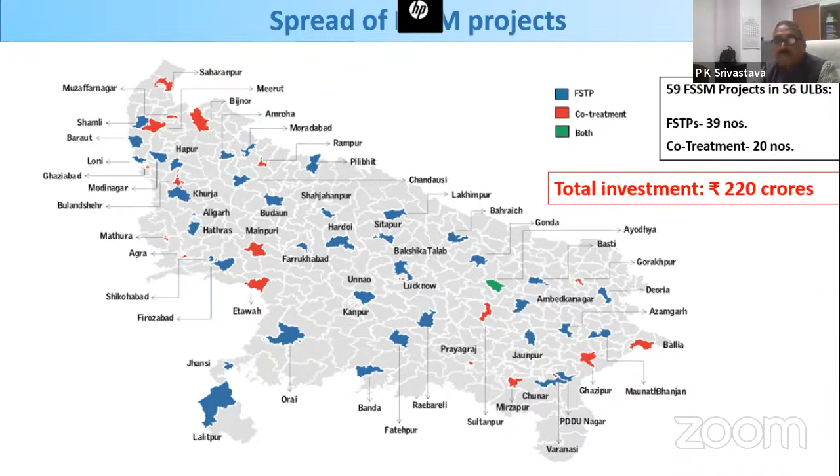So with the help of CSE, we have prepared the bylaws to help small ULBs, so that they can operate and maintain their FSTP and impose their charges for the services. COVID was also one of the challenges - almost 2 years we couldn't start so many of our projects due to COVID.

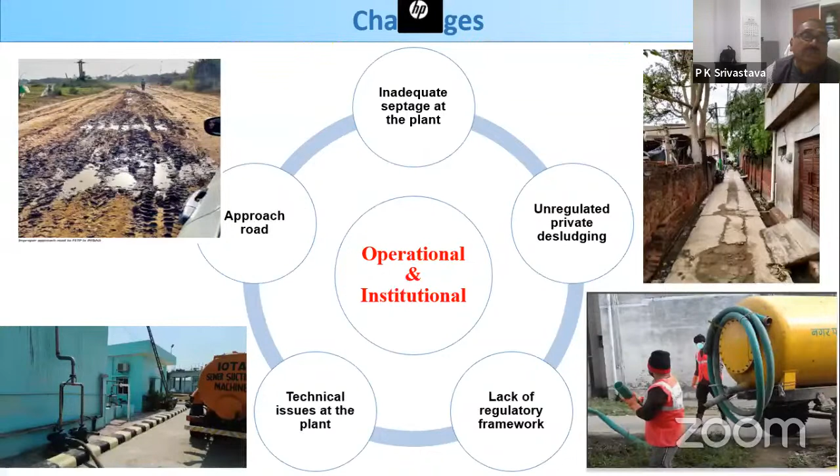So these were the challenges. Now, how were we able to address them? First we acknowledged the challenges, identified priorities, set achievable goals with milestones, communicated clearly and regularly, and monitored progress to address nagging issues. That's how we were able to meet the challenges, but we are still on the way, and we are trying to successfully operate and maintain the FSTP plants.

Absence of proper framework guidelines. As I already mentioned, it is known that many ULBs have not notified desludging fees, lack of clarity on roles and responsibility of different stakeholders, no monitoring of private operators, and lack of clarity on operations and maintenance of plant and desludging fees.

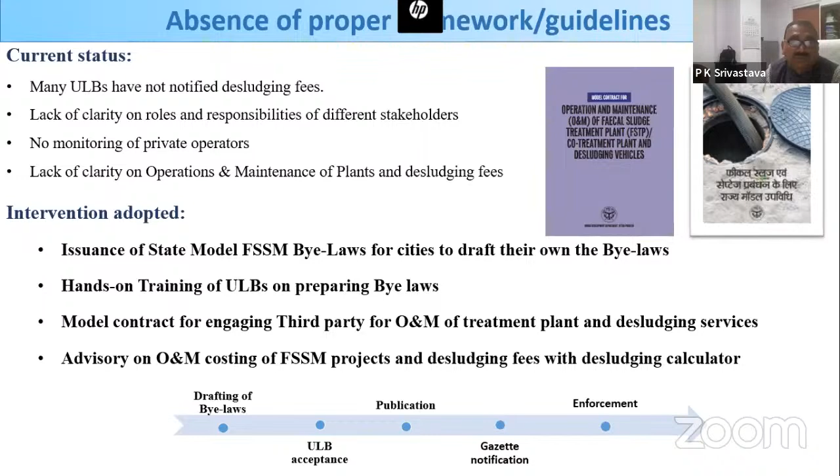Issuance of state model FSSM bylaws for cities to draft their own bylaws. We have issued the model bylaws to the ULBs so that they could change some parts in their draft as per their local requirement, and put their bylaws to their elected local body for Gazette notification. We have also conducted hands-on training of ULBs on preparing bylaws, with so many workshops at headquarters in Lucknow and at the regional level, with the help of CSE, to make them skilled with technical know-how on how to operate their plants.

Inadequate septage at the treatment plant. Actually, the biggest challenge is the septage. The required amount of septage is still not coming to the plant, because the operators are in the habit of taking fecal sludge from households and draining it out in the lane, in the drains, or in open land. So we are trying to punish them, identifying that type of operator.

So we are trying to identify the private operators operating in the cities, and registering them in the local body's licensing system, so they could become an instrument for our FSTP system.

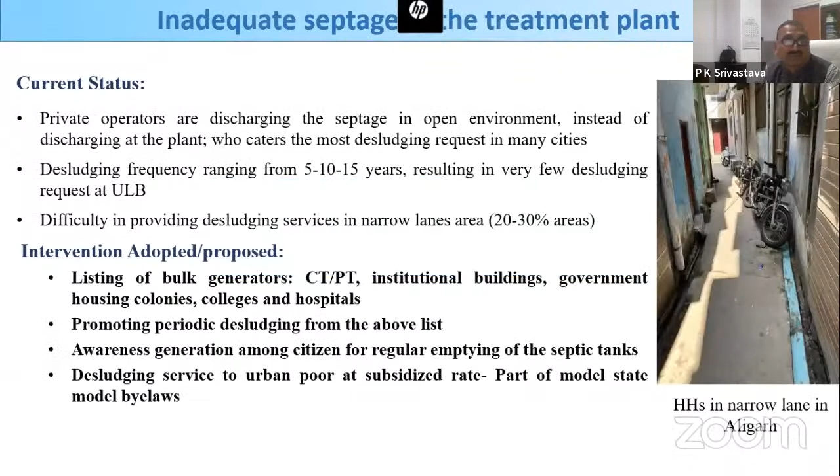Listing of bulk generators, community toilets, public toilets, institutional buildings, government housing colonies, colleges and hospitals, promoting periodic desludging from the above list, awareness generation among citizens for regular emptying of septic tanks, desludging services to urban poor at subsidized rates, are part of the model state bylaws. So these are the interventions adopted or proposed.

Next slide. The unregulated private operators are the main issue, because the majority of ULBs have private desludging operators providing septic tank service to households. They discharge the emptied septage into open land or water bodies. They are mostly unregulated. We push ULBs for identification, registration, and licensing of private operators.

The forms format is available in the model bylaws document. We also encourage ULBs to fix desludging fees in consultation with the private operators and other stakeholders.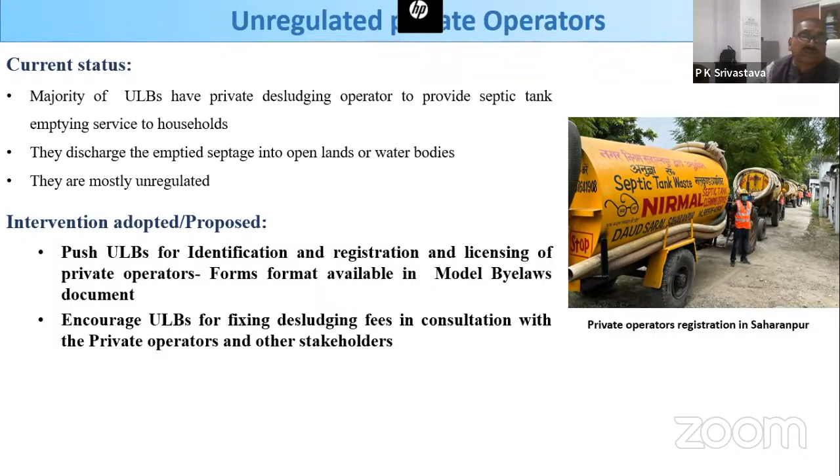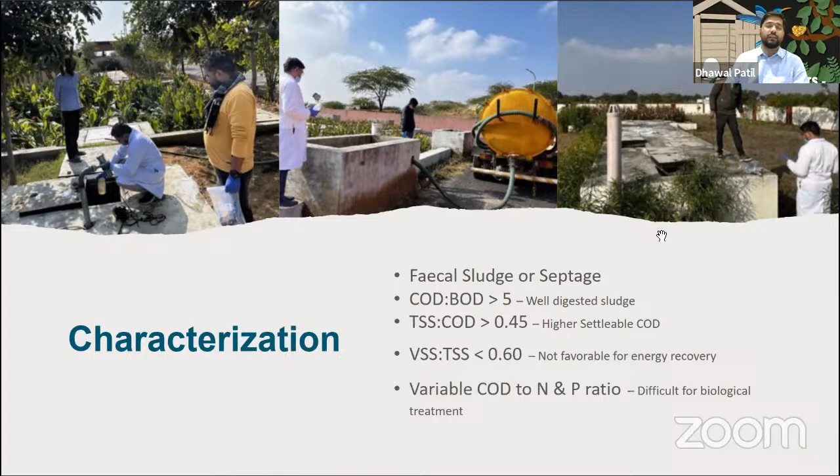In India, various treatment units have been put together to form a treatment plant. I usually don't use the word 'technology' because technology is something put together and packaged already. As a designer, I prefer to understand what I want to treat, what the end need is, and then put together different treatment units which serve that purpose.

For solid-liquid separation in India, there are settling thickening tanks and anaerobic digesters. Although digesters are used for digestion and stabilization, they are also being used for solid-liquid separation to some extent. Unplanted and planted drying beds are also used for dewatering and drying, so solid-liquid separation happens there too, along with geotubes and screw presses.

There is also confusion, which I have seen from my practice, between solid-liquid separation and dewatering - these are not interchangeable words. Dewatering is different and solid-liquid separation is different. Solid-liquid separation essentially helps reduce the quantum of sludge, or rather the thickened sludge we get after separation, and it helps optimize the sizing of the planted drying beds or all the solid fraction treatment units. For the liquid fraction, there are treatment units from the DEWATS family: anaerobic baffle reactor, anaerobic filter, planted gravel filter.

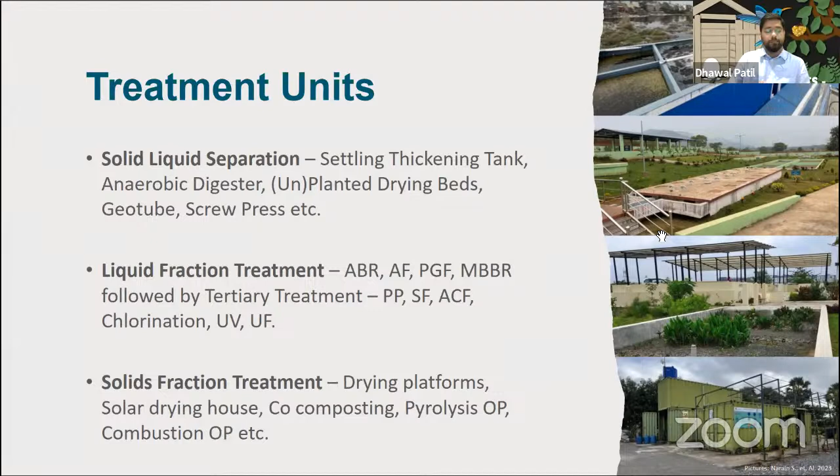For solid fraction treatment, usually drying platforms, planted and unplanted drying beds are used. Solar drying houses are used. Co-composting is another method which is being tried and tested. Then pyrolysis omniprocessor and combustion-based omniprocessor. These are also sort of plants which have been operational for a long time in India.

My personal comment on this is that the old MOEF 1986 norms are good enough for FSTPs, fecal sludge treatment plants or septic treatment plants. That is because the volume or the mass of BOD, COD and TSS which is handled by these plants is significantly less. The water coming out, even the volume of that water, is very less, and it can be easily reused in the plant premises or in a restricted manner somewhere, which the Odisha state has been doing. So in such cases, lenient norms are much better. I would re-quote, because I really liked it, Mr. Stephen's statement that 100 plants with 30% efficiency are more effective than 10 plants with 90% efficiency. And it is very true.

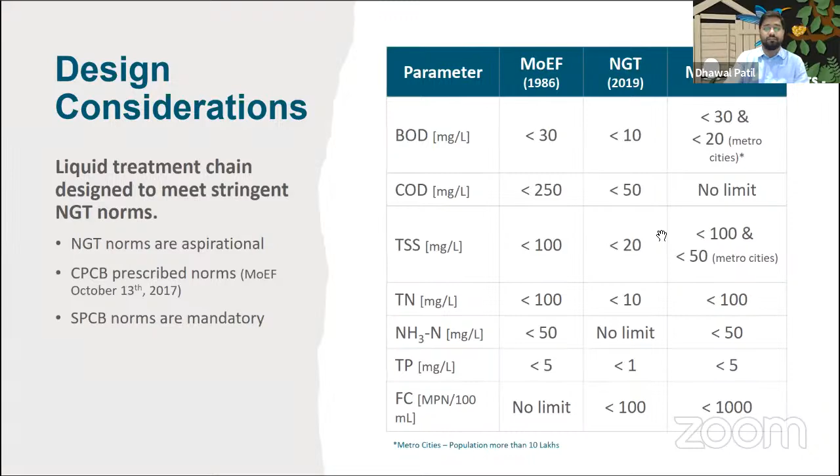In case of the solids treatment chain, there are no standards which have been prescribed by the Central Pollution Control Board or even the state pollution control boards, and hence usually when the FSTPs are designed, the solids treatment chain consists mostly of dewatering and drying processes. In a lot of cases, I have seen that sludge drying beds are put before the solid-liquid separation, or as a solid-liquid separation unit, which inherently increases their size.

Huge sludge drying beds have to be made because they are then designed for hydraulic load. In cases, I have also seen that during operation, the sludge loading rates are not even. A lot of times I have seen that the sludge is dumped onto the drying bed at a thickness of more than 30 centimeters, and then it is allowed to dry over a period of time. Whereas most of the time, sludge drying beds need to be loaded in an incremental manner, so that after 5 days you can load the same bed again, and then incrementally you reach 30 centimeters. But that is not the case.

In most of the cases, the design is done in the right way, but the capacity building of the operators is a lot of times missing.

The NFSM, the National Fecal Sludge Management Policy, which was published in 2017 by MOHUA, recommends that for solids, we should follow MSW Rule 2016. MSW stands for Municipal Solid Waste Management Rules. In these rules, the standard is for municipal compost. Now, these standards are not directly applicable to these solids, because although these solids do contain NP and organic carbon, they do not contain it to the extent or concentration prescribed under the MSW rules.

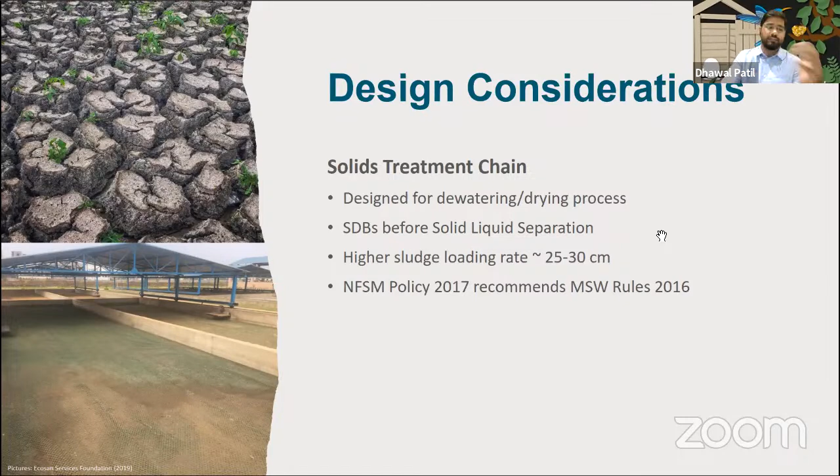And hence, a lot of times there is neglect towards treating the solids or the thickened sludge completely at most of the FSTPs. They only look after the liquid treatment part, because that is sort of mandated by the pollution control boards.

Coming to the design capacity, across India there have been more than 400 FSTPs of various capacities. In a lot of places, I have seen that the design capacity of FSTPs is less than 10 or 15 KLD. My personal comment would be these should be avoided for two reasons. One, it has low or no return on investment—the cost, not just capex but even opex, cannot be recovered through the desludging fees or taxes in smaller towns. Rather, DRE or land application in restricted areas is much better to handle these cases.

In certain states where the collection and transportation of fecal sludge and septage has been regulated, like in the case of Odisha, the 10 and 15 KLD plants are also running fantastically. The reason is because the sludge is reaching there, and daily 10 to 15 KLD of load is getting treated. So unless and until we focus on taking the fecal sludge and septage from the household containment units to the treatment plant, we should not be heavily investing in treatment facilities which are very small.

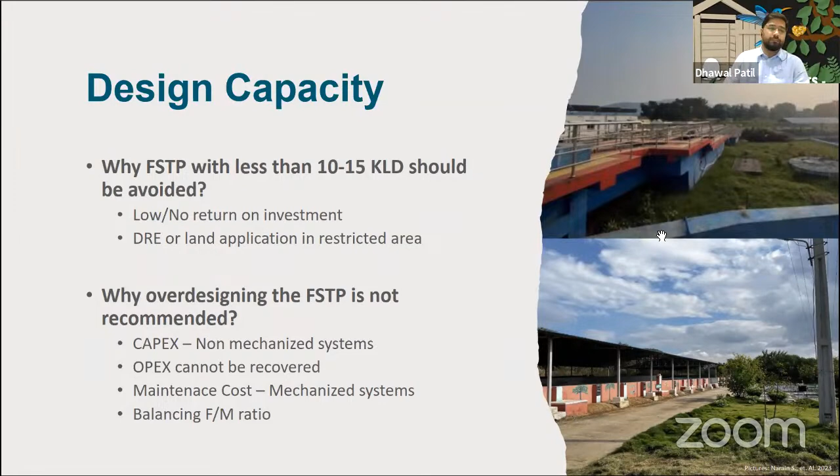Balancing the F/M ratio—food to microorganism ratio—in the biological treatment units is very critical for maintaining efficiency. When you have designed the plant for a higher capacity but are feeding it at a lesser rate, it affects the whole microbial concentration in these reactors, and eventually the efficiency does not peak up as it has been designed. So over-designing of FSTPs is also not recommended in most cases.

Implementation and O&M is my second-last slide. A lot of times we have seen that the DPRs, detailed project reports, and the good-for-construction drawings are made very nicely. However, when they are translated onto the ground, the contractors—because most of them are civil contractors into the construction business—don't understand the implication or impact of, say, not giving a 1% slope to the constructed wetland.

There are small nitty-gritties, especially with non-mechanized systems such as DEWATS and sludge drying beds, etc. These small pointers are very important, and if neglected at the implementation stage, they create a lot of problems at the operation and maintenance stage.

A lot of times we see that in the constructed wetland, clogging happens and the hydraulic flow inside the wetland, or the planted gravel filter, gets affected. You can see that some plants are dying while others are growing very nicely. The efficiency also gets disturbed a lot. So operation and maintenance is very important, and giving proper care during the implementation stage is also very important.